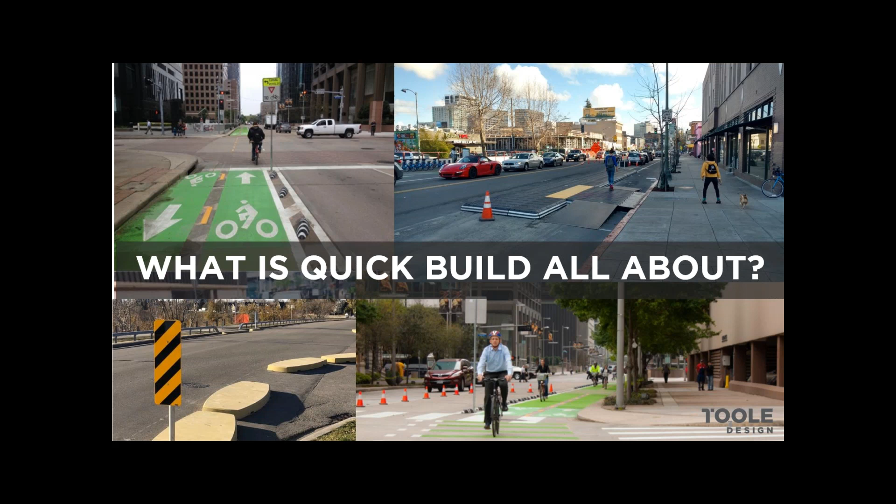So first of all, quick build is an approach that focuses resources, whether that's funding, staff, consultant time, engagement, advocates, all of it, to deliver transportation projects that can be constructed very quickly. Quick build projects use semi-permanent materials, and the whole point is that they allow adjustments to be made once the project is up and running. They can be pilots where the city council votes later whether to keep, remove, upgrade, or change them, or they can just be part of the phased implementation of networks.

Why is this something we've been seeing so much more of lately? Well, part of this is there have been a few really bold and visionary leaders in a couple of cities around the world who piloted quick build designs and gotten a lot of attention for it, and we're going to talk about those. Many of those are showcased in the case studies we're presenting today and tomorrow.

But bigger picture, there are a number of national and international trends pushing jurisdictions towards quick build solutions. The first is certainly the rapid expansion and adoption of Vision Zero around the US, with many dozens of cities making highly public commitments to eliminating traffic deaths and serious injuries.

I wonder how many participants on the webinar today are from Vision Zero cities yourselves, where you've been tasked with helping to implement a Vision Zero plan, and you're looking at that mandate and comparing it with the typical capital budget and timeline for project implementation.

It's just obvious in so many places that there isn't time to stick to conventional methods to implement life-saving infrastructure solutions and achieve Vision Zero goals.

Second, there's been a lot of research to document the rising demand in cities for active and sustainable transportation, related to the convergence of efforts around reducing greenhouse gas emissions, an increased focus on biking, walking, more people living healthier lifestyles, and even the emergence of micromobility, things like scooters, which have put more demands than ever on our sidewalks and bike lanes.

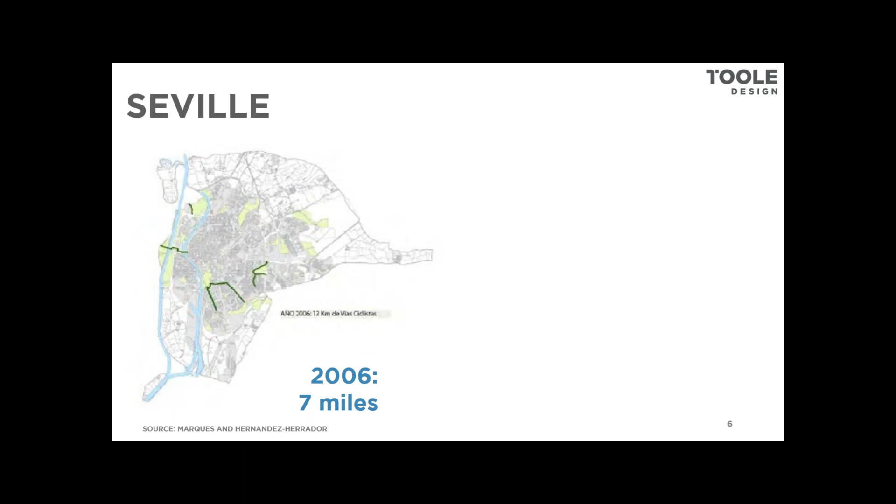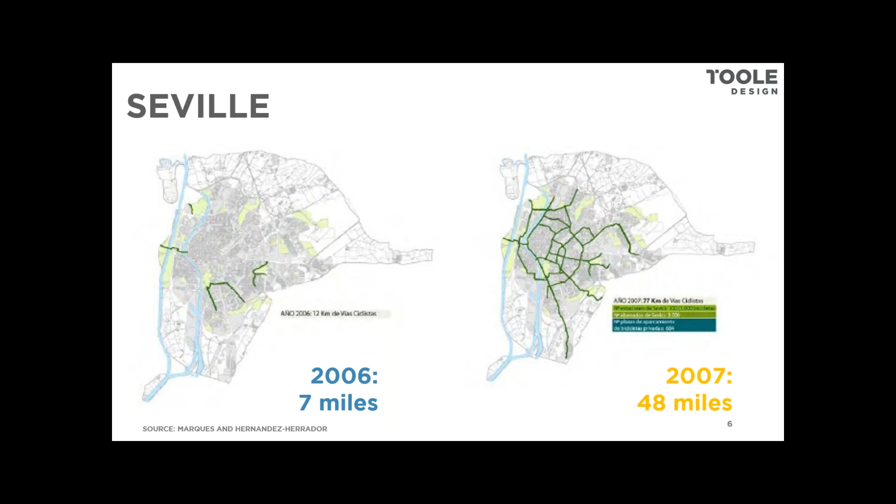And the investment very intentionally created a connected network that reached most of the neighborhoods in the city and connected them to the city center. The other thing that's amazing is that they did a lot of research about the effects of this implementation on ridership and safety before and after implementation. And that's why, because they have that data, we're able to actually track and understand what the impact was.

Again, something that I'm guessing many of you have experienced: people upset about parking removal and travel lanes being converted to bike lanes, business owners upset about construction, all the same concerns that we all face in our cities. But that quick build method allowed them to move forward and get the community to experience the system rather than just talking and arguing about it.

So what did the facilities look like? These are the bikeways from Seville. Many of them were built via repurposing transportation travel lanes or sidewalk space. Many of them were installed using paint and bollards and other low cost tools. That's a key aspect here that you're going to hear about a lot — providing high comfort facilities that focus on safety and are accessible to the broadest audience possible.

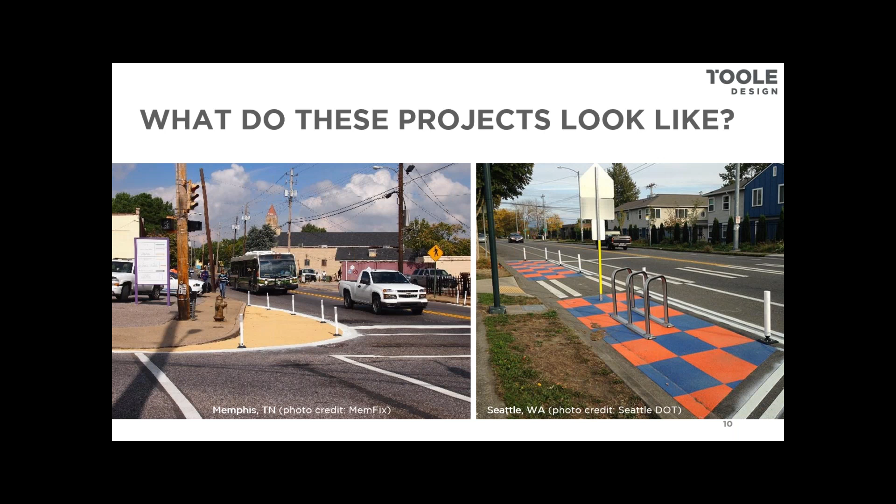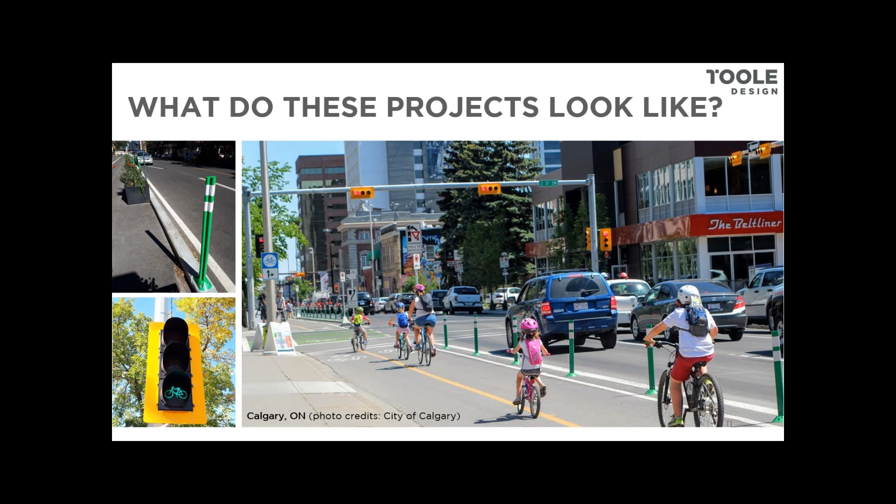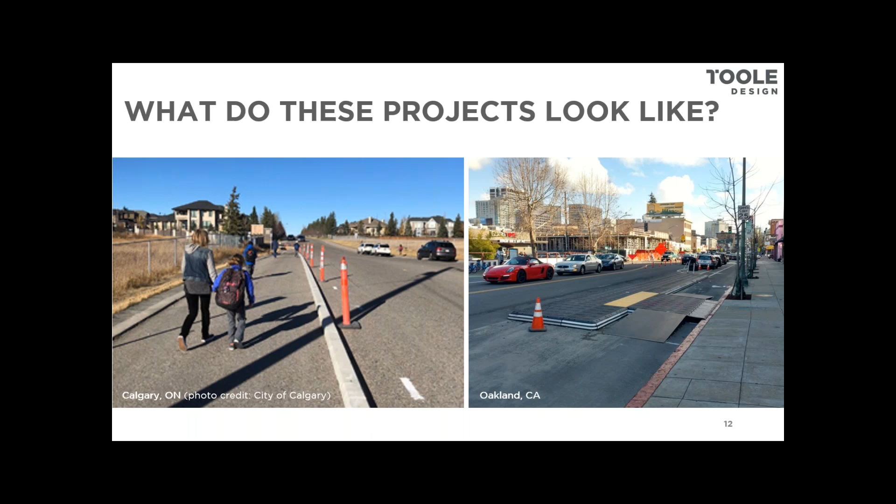So now that we have a common definition and vision in our mind for what we're talking about here, let's dive a little bit deeper into why so many jurisdictions are taking this approach. The first reason, of course, is that results from transportation projects often take way too long to implement. In my experience, it's pretty typical for a standard bicycle and pedestrian project to have maybe a two to three year timeline.

It's very common. Now, during this time, staff can change, budget expectations can evolve, the public can get frustrated, especially when the project is responding to a known safety issue. People are still out there walking and biking every day during that two to three year timeline under unsafe conditions. And that two to three year timeline might be for one intersection improvement, or one mile, or even a half mile or quarter mile of new bikeway.

And so when the public step back after that two to three year timeline and compare that pace of progress to the pedestrian or bicycle master plan, it's no wonder that in many places they develop a sense of skepticism or frustration.

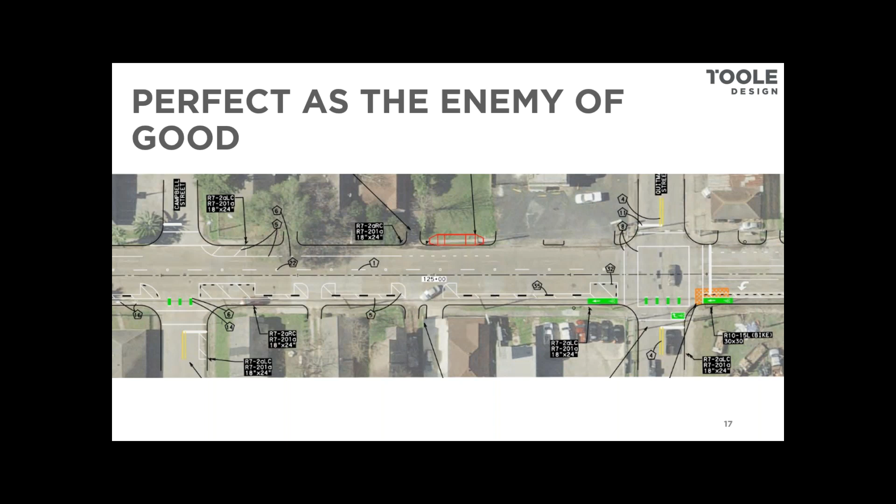Another reason this is a really fantastic approach is that communities are tying their quick build projects to broader goals related to community development, health, and sustainability. With one mile or a half mile of bike lanes, or one intersection improvement, it's really just a bicycle and pedestrian project. Whereas with a citywide network of Vision Zero infrastructure investments or transit access improvements implemented over a short timeline, you really are able to tell an authentic story about greenhouse gas emissions, economic development, physical activity, social cohesion, etc. So it's much easier to tie these projects to your broader goals.

In San Jose, you're going to hear more about this tomorrow—the emphasis really has been about pedestrian and bicycle safety. In Edmonton, these were about economic development and about attracting and retaining talent in their downtown. In New Orleans, these types of projects have been paired with the Moving New Orleans Multimodal Transportation Equity Plan, with a very strong focus on providing equitable transportation opportunities for communities that need greater access to services.

And the last reason we've talked about already is that everybody's facing the same thing that I imagine many of you are: challenges with limited funding. These quick build projects allow us to stretch our transportation dollars. They're oftentimes using lower cost materials, which means you can implement more for your dollar.

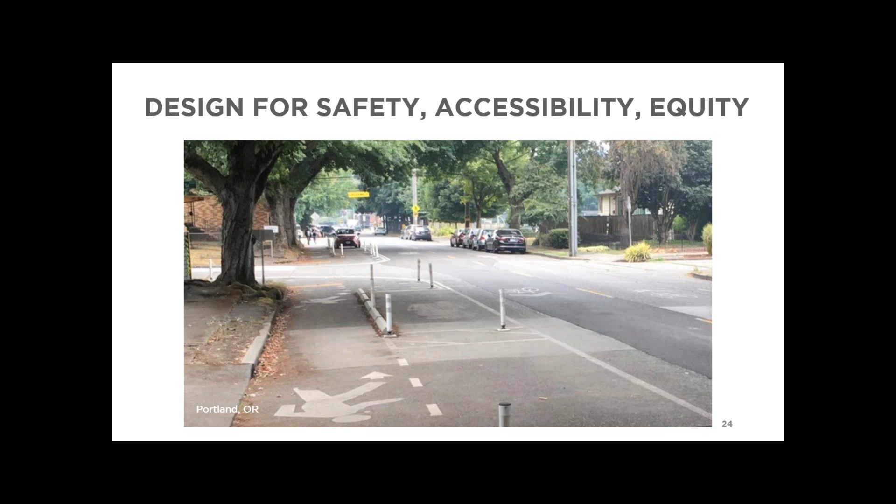That leads to community engagement. We'll talk more during the next case study and tomorrow about the importance of community engagement and collaboration. Something we've learned from projects around the country is that the idea cannot feel like it's being forced on the community. There's a way to do this where the public will be thrilled at how quickly progress is being made, since this is what they've always been asking for from your agency. But if it starts to feel forced on them, it will fail. Striking that balance with a robust engagement process is critical.

You'll hear about that today from Harris County and Houston, Texas, and more from San Jose and Minneapolis tomorrow. It's really important to remember that your public engagement doesn't stop on opening day.

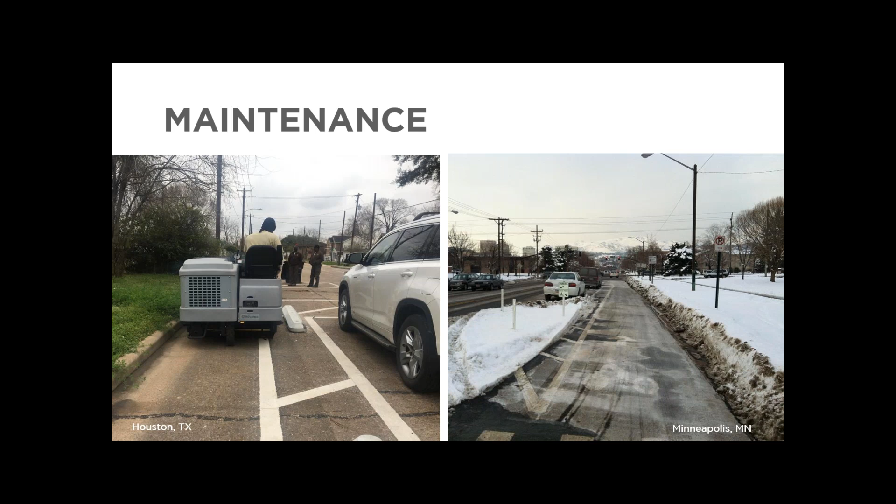I know many cities, when it comes to separated bike lanes in particular, don't have the processes or equipment in place for snow clearance, sweeping, and maintenance. Most cities, as they build out their separated bike lane networks, have ended up either investing in that equipment or making minor design tweaks with their existing equipment in mind to make sure it works. So please consider maintenance from the outset.

The last tip for success is including design and operations together from the outset. I've touched on this a bit already, so I'll leave it at that, but bring your operations team into the design process early on.

I wish there was a playbook, a recipe book we could just follow for how to do this. But the truth is, in every city and county we've looked at, the model for resourcing, staffing, and managing this has been very different. You'll learn more about that through the case studies we've discussed today. I just want to emphasize that you'll need to come up with a model for staffing and managing this that works for your city.

A couple of examples: in Austin, Texas, the city has bond funding for capital projects. They've hired a consultant team through a staff augmentation contract for an ongoing period, focused on implementing quick build and permanent transportation investments similar to the ones we're talking about today.

The Houston model is different. You'll hear about how the city transferred ownership of their roads to the county for the design and construction phase, and Harris County hired the consultant. This was a really collaborative process that Amar is going to talk about more in just a few minutes.

In New Orleans, Baltimore, and many other places, People for Bikes has been a key partner, investing resources, staff, and support for some of these implementation efforts. There are lots of different methods—like in Edmonton, where the city's operations department installed all the facilities themselves and did a lot of the design work in-house. There are many models for this, and I'm sure there's one that will fit your community.

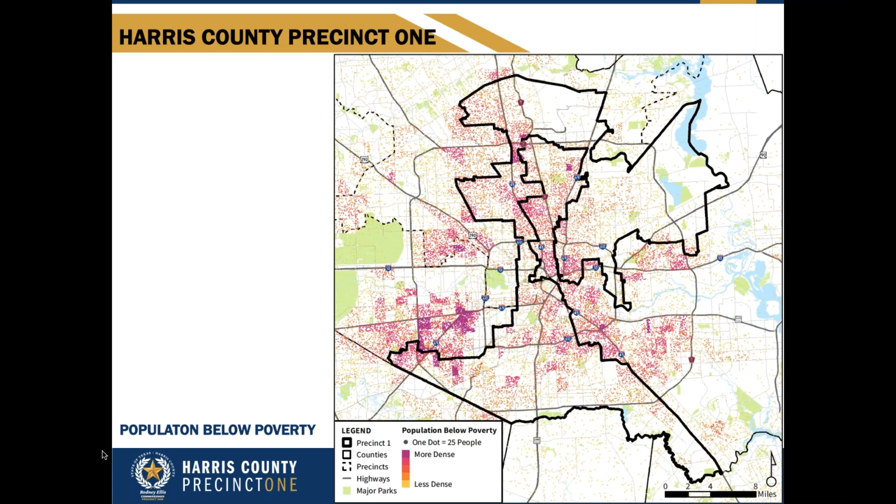I have to give a shout out to our partners at the City of Houston and the Houston Parks Board. In 2012, there was a bond referendum, and the city, with an overwhelming majority, approved $100 million in funding toward new trails and parks. That's the best way to describe these bayous — Harris County has around 10 bayous.

You don't see the two on the north, but you see eight in the picture here. This Bayou Greenway initiative was about converting these east-west bayous into park space, giving communities access to nature rather than treating the bayous as just drainage channels. With that bond referendum, the goal was by 2020 to achieve 150 miles of trails and 3,000 acres of green space — a great public-private partnership.

100 million was raised through the bond referendum, with another 120 million from the private sector. Commissioner Ellis, as always, came in at the end and closed the deal with the remaining funding needed to complete the Bayou Greenway 2020 initiative this year.

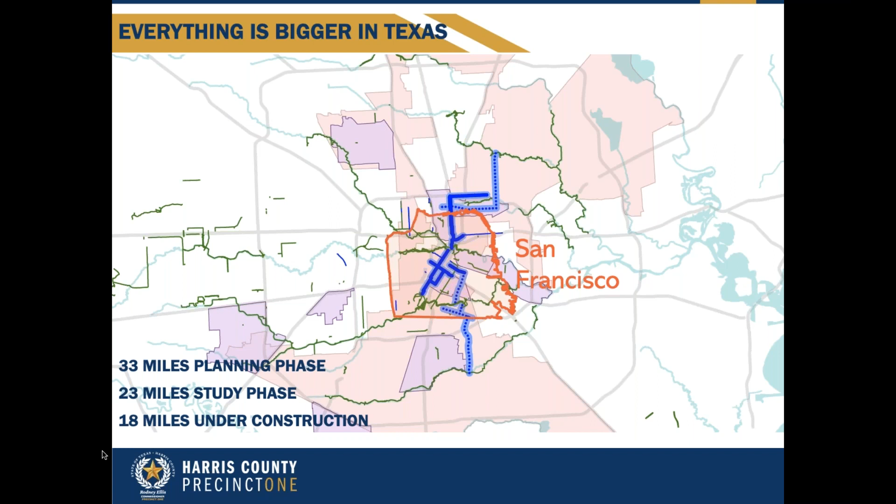We will have built 13.7 miles of protected bike lanes, 1.5 miles of striped bike lanes, still high comfort, 2.5 miles of neighborhood bikeways, and 0.3 miles of off-road segments—just a summary of what would have been achieved with this quick build project.

Now, to tell our story of quick builds, here was the structure. We achieved this under an agreement framework. Harris County is pretty nimble in terms of designing and implementing infrastructure, so we had that really supporting us.

A few months before that, the city and county had come up with a master interlocal agreement that did not require us to go to city council every time there was a partnership project. That allowed us to leverage that structure, because Harris County cannot spend money on infrastructure that belongs to another municipality.

We had to have a way of taking over the city streets on paper. As we took over the city street, we owned the street and could implement and invest in that infrastructure. That was the most effective mechanism to meet the commissioner's 1-year deadline.

The way we divided labor between the city and county, you can see on that spreadsheet: Harris County would be funding the infrastructure, we would be planning the network with our planning and design team, we would be designing it, constructing it, and as part of construction there's a 1-year maintenance period, so we would maintain the network for 1 year and then hand it back to the city.

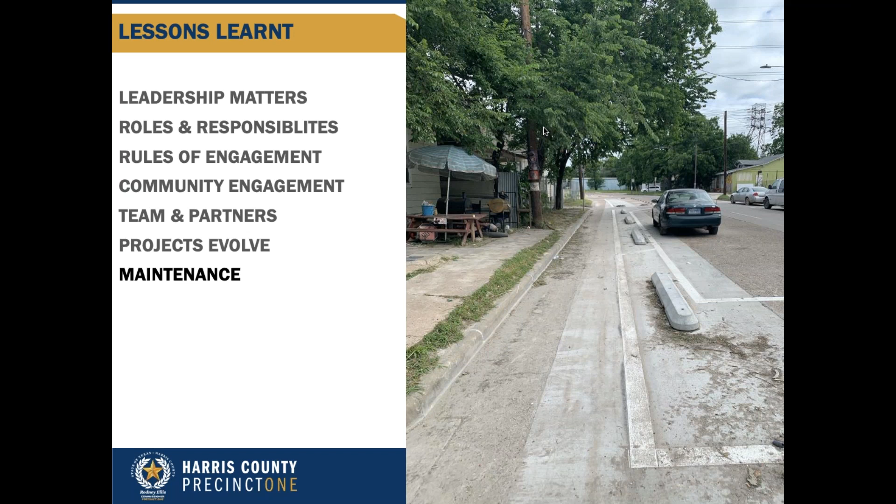And then looking forward, as I described, my boss was excited to see it. He rides by the ongoing projects every day from his home to his office downtown, and he'll talk to the ongoing construction contractors and our project managers on the street. He'll call me and tell me how excited he is, but then he'll say, what is the next big thing we are doing?

So the next big thing we are doing is, we connected 3 bayous with the first project. We are now adding 3 additional communities in Northeast, Southeast, and Southwest Houston as the next phase. These are not going to be quick build projects by any means, but the intent is still the same: to use existing infrastructure as best as we can. This would add another 18.4 miles of high comfort bikeway, connecting now 5 bayous with each other.

And then partnerships also lead. We are looking at another partnership in the next month with partners who would reach out to you. Another neighborhood reached out for another 7 to 10 miles of bikeway network that we would partner with them on. We recently funded—it's not just about funding the infrastructure.

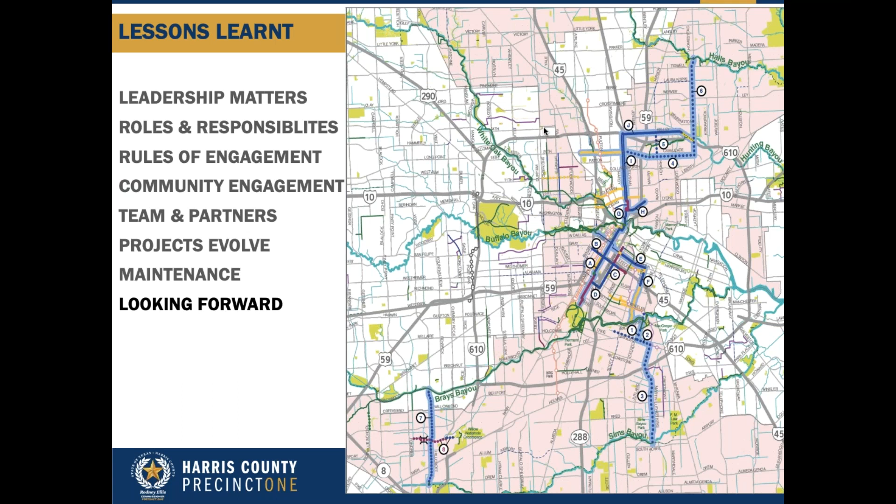In underserved communities, sometimes you also have to provide access to bicycles. So we partnered with our bike share system, Houston B-Cycle, and we just funded—over the last year or two, we've funded over $1 million of B-Cycle stations and B-Cycle infrastructure in Precinct 1.

That is my presentation. I'm going to hand it back, and I am ready for any questions. Me and Ali are ready for any questions you all may have.

Great, thanks so much, Amar. I'm really excited to learn about what you're doing in Harris County and in Houston, and I'm glad you're ready for questions, because we have quite a few of them. So let me queue up our next slide here.